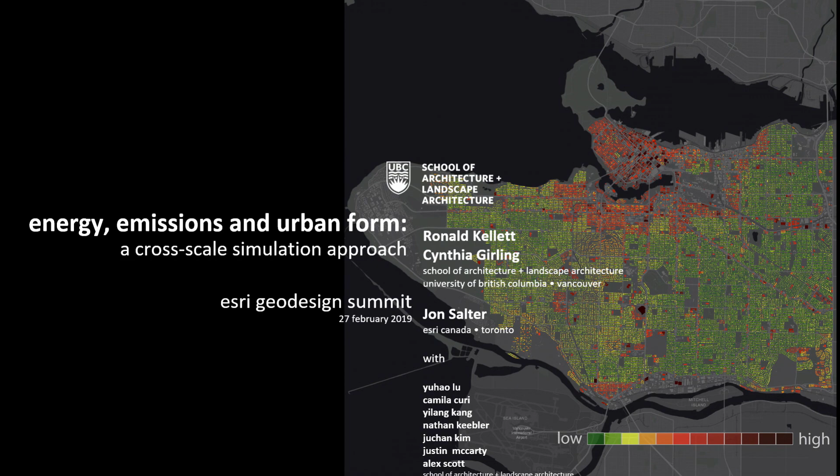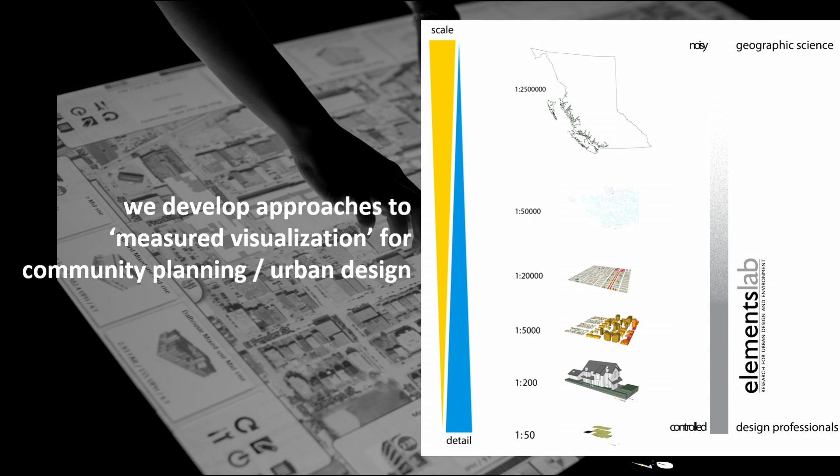So first, just a couple slides about who we are. Our lab develops approaches to different forms of measured visualization in community planning and urban design. In the geodesign ecosystem, we're crossing those four scales at the bottom. We're mostly design professionals, but our ambition is to understand those same ideas at neighborhood scales. We're a live research group of faculty and students in architecture, landscape architecture, urban design, planning, engineering, and economics, trying to bring those disciplines together to inform decision-making in the communities with which we work.

We're very sensitive to the notion that urban form is a context-rich experimental plane, including a great deal of existing and new buildings across many scales and types of cities. So we've anchored our work in taking visual spatial representations as an armature, so to speak. We've taken some very sophisticated tools, which we've heard much about in the last several hours, and tried to strip them down so they're more accessible to the broader diversity of communities with which we work. We also do some work in spatial indicators and metrics.

So I'm going to pick one project that's ongoing right now. It's called Built Environment, Energy and Emissions, and we're doing it for an Institute for Climate Solutions in British Columbia called Pacific Institute for Climate Solutions. The goal is that this agency has asked us to look at solutions that would reduce energy and emissions intensity of the 183 municipalities in British Columbia that also improve the quality of these municipalities at the same time. So we're mostly talking to policymakers at both provincial and municipal levels.

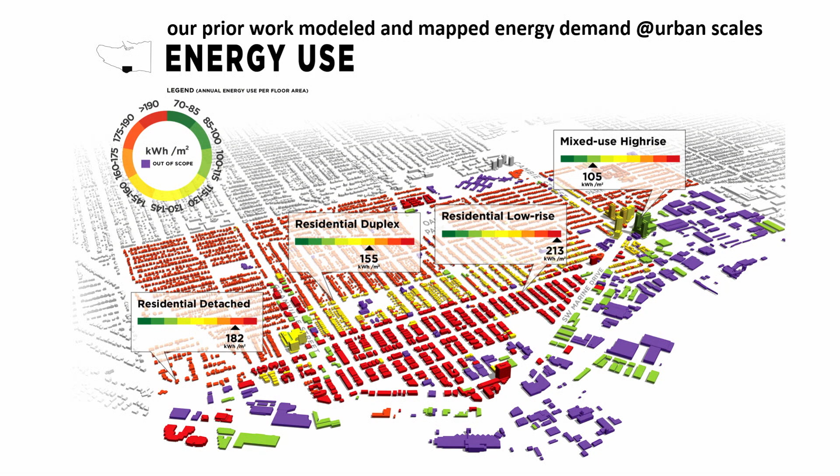And we've got this 183-community portfolio of very different sizes, density, ages, etc. As I mentioned, how we work is whole systems across scales. So our prior work, up until this adoption of some of these new tool sets, has always been around mapping and modeling a variety of things: water, energy, housing demand, etc. But we've always worked at this district/neighborhood scale.

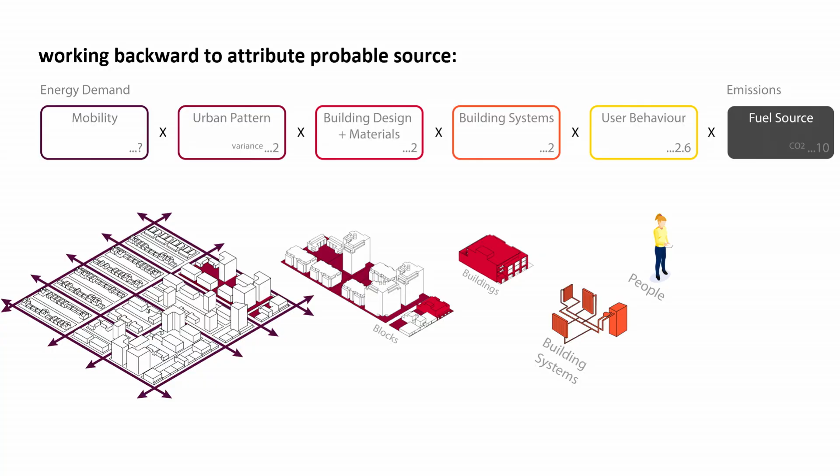In the energy realm, one thing we've spent quite a bit of work on is trying to take the modeling results at urban scales and work backwards to attribute them to the probable sources. So if this is the total energy use intensity number across a neighborhood, where did it come from? Mobility, urban pattern, building design, materials, building systems, user behavior, etc.

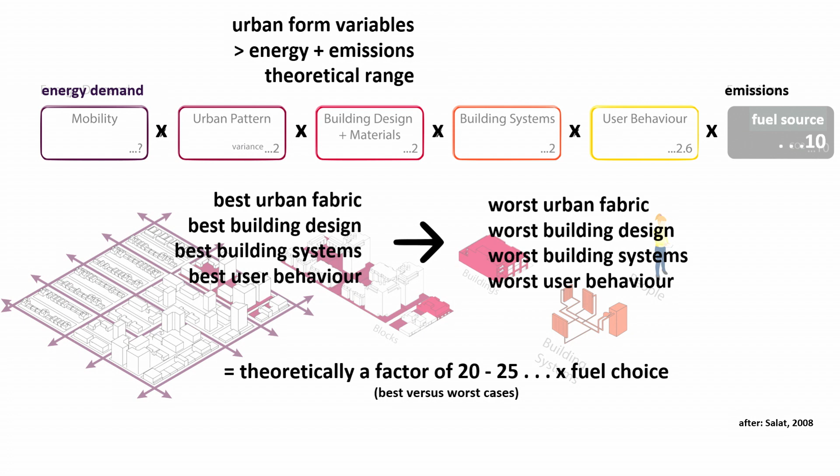The reason this is hugely important is that the same hardware performs very differently under different contexts. So if you take the same urban fabric, best versus worst, best building design versus worst, the range is about 20 to 25 times. And if you add fuel choice, that's another factor of 10 if you're looking at emissions instead of energy demand. So what we were trying to figure out is how we could help these 183 municipalities know which of those dials to turn that work best in their particular context.

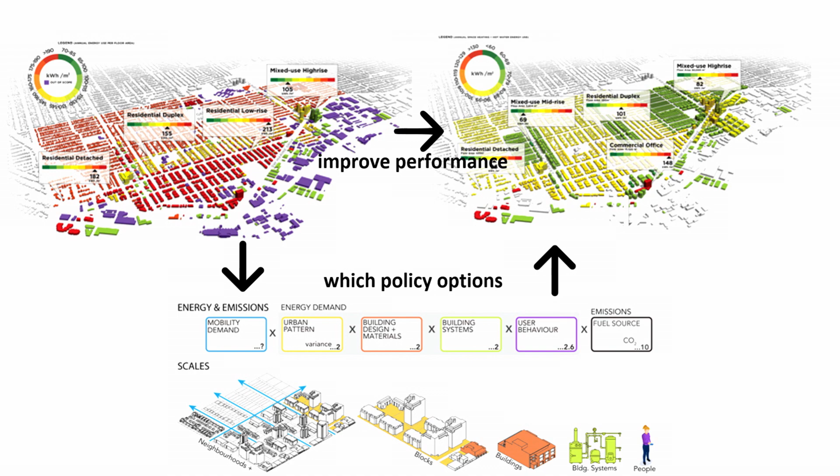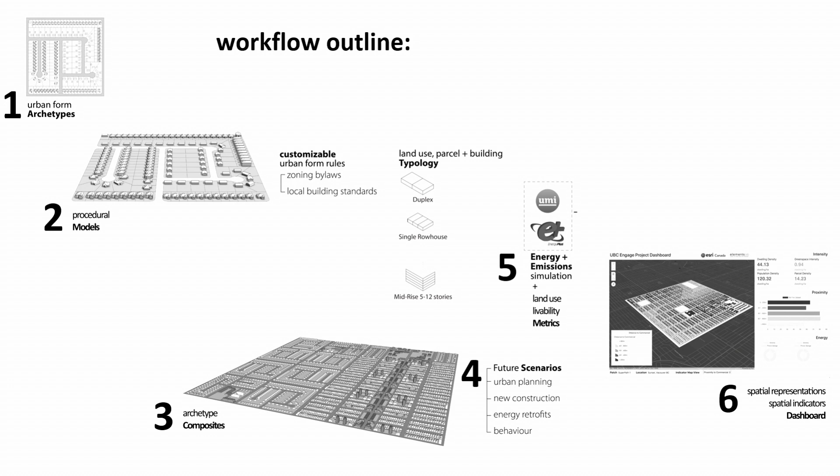So John and I are going to take a quick trip through the way we've approached this, and each one of those steps is a little project within a bigger project, so we'll just skip through this fairly quickly. The first thing was, in order to model all these different cities, we adopted an archetype approach to simplify the complexity of all these cities down to a few patches and patterns. We picked 6, based on their population, whether they were growing or not, and based on their geography and climate.

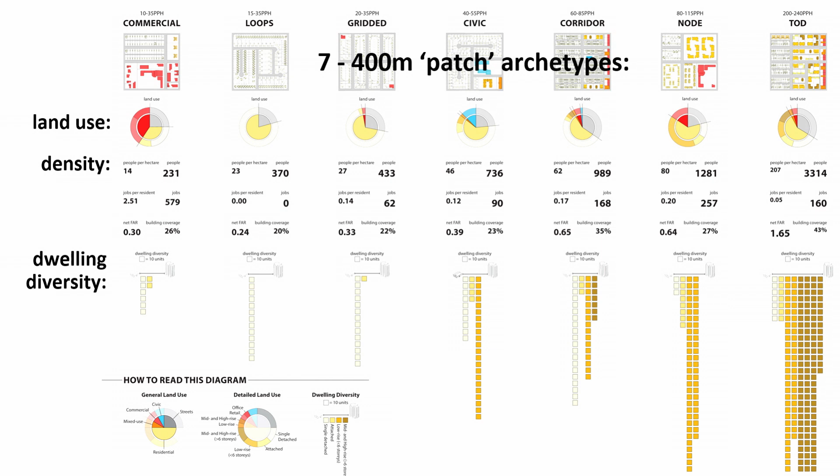After a lengthy series of analyses of land use in whatever millions of census tract areas that might be represented in those 6 cities, we distilled it down to about 7 400-meter patches. Each of them is different in terms of its land use distribution, its density, and the diversity of dwellings that are supported within that pattern.

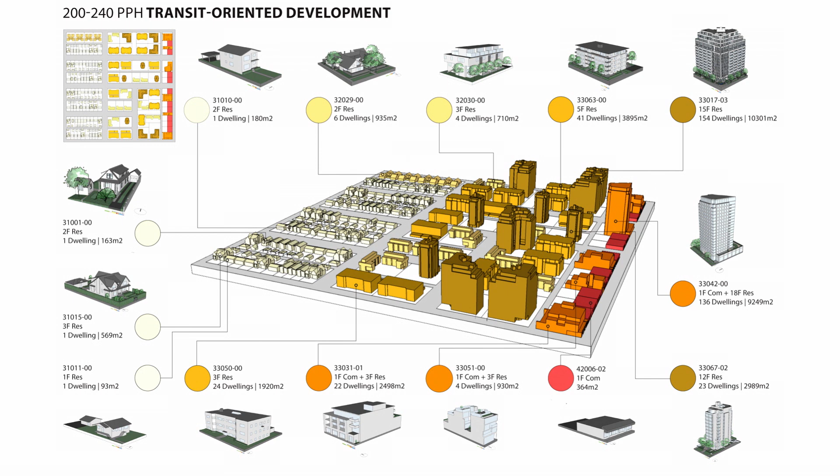Each pattern has a description that includes its land attributes and its building attributes. This is the densest one. It just shows you what it takes to achieve those overall metrics.

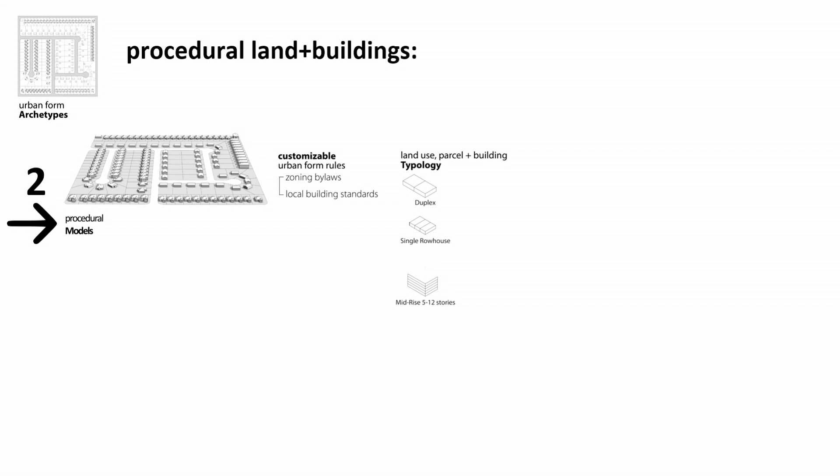We tried to take that approach and move it into a much more rapidly replicable and adaptable procedural modeling system. So first we looked at each of the land use types in those cities and patches, and tried to distill the range of parcel types associated with a particular land use and density. Then we broke out the building types, looked at their morphology, and started to isolate their attributes.

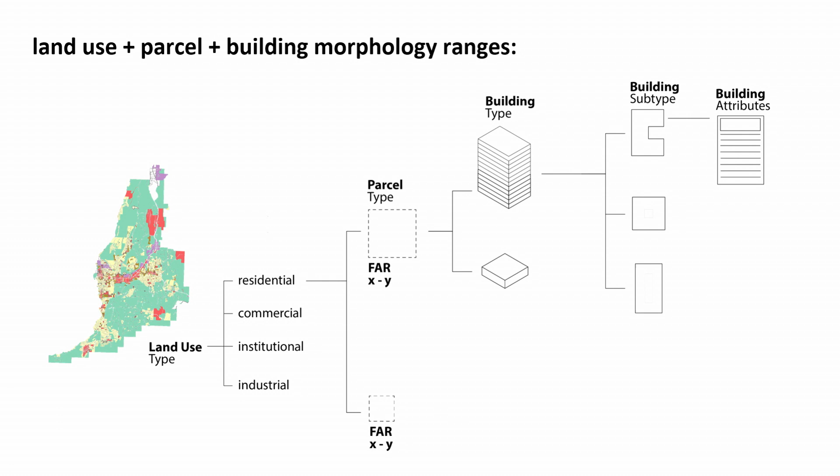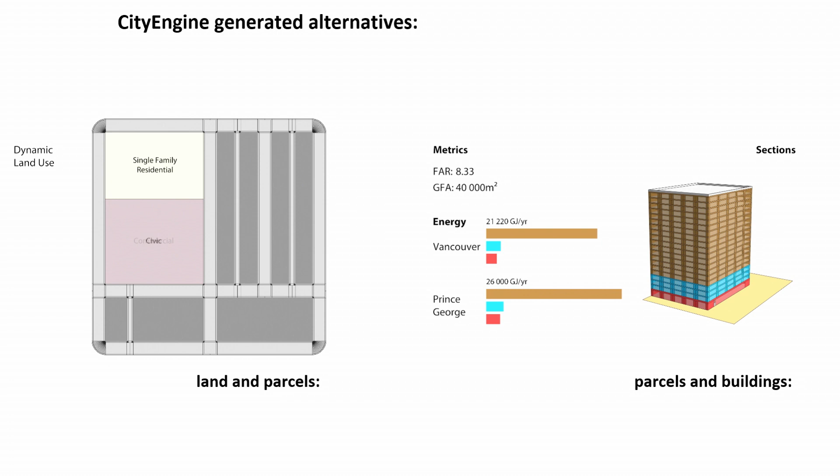The first thing we did was try this in CityEngine, because we thought we'd make a CityEngine model of all these patches and be able to change the parcels and building types that occupy them. That would be a sufficiently robust system to help us put these patches together in interesting ways, helping these communities understand what their urban form options might be.

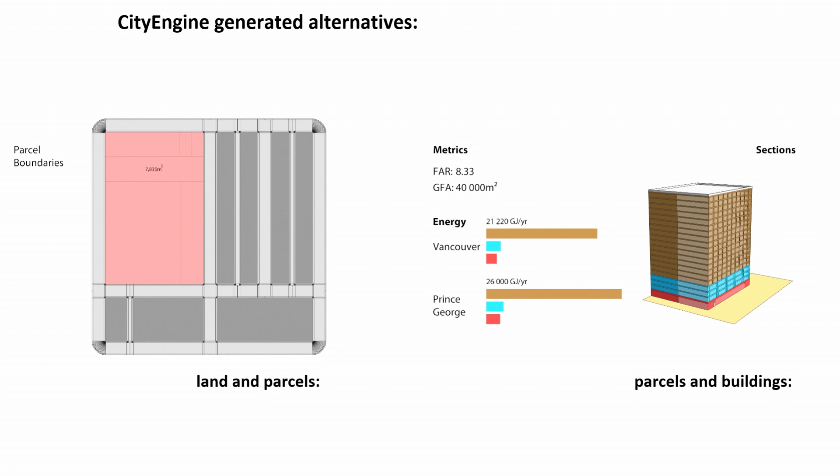And I think this is still running here. Unfortunately, I don't talk as long as the animation runs, but it ends in about 30 seconds here.

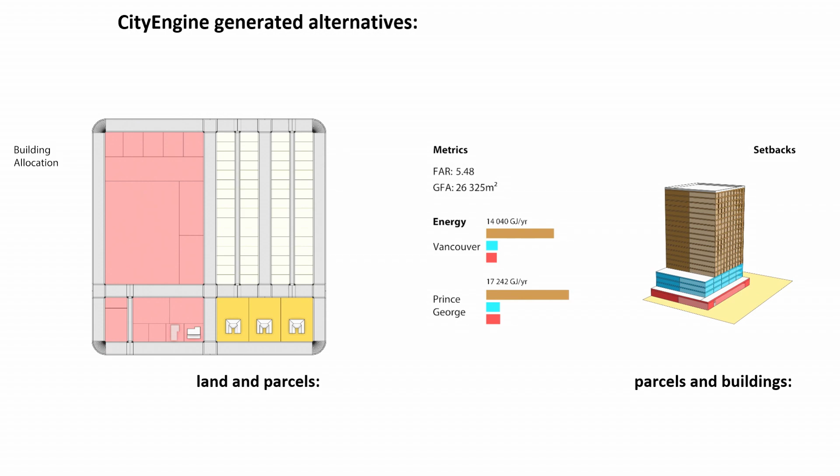The idea was that we would take this archetype patch, then customize it for the parcel pattern and the street network and the zoning envelopes, as many people have talked about for each of these units.

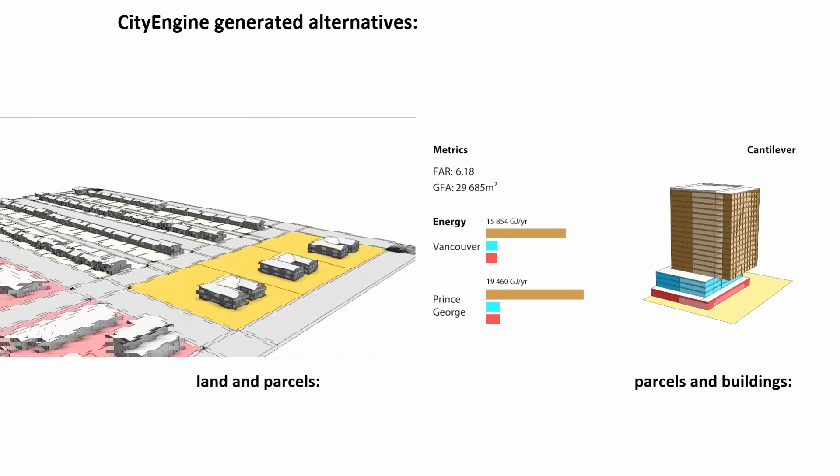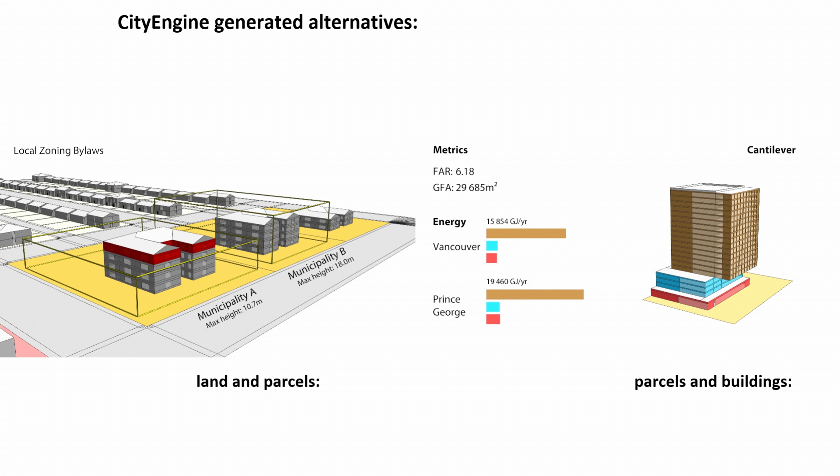This last image looks at the same zoning category in 2 different cities, one with a different height limit or setback system than another, and we were trying to figure out if we could embed this into the approach.

Quickly we realized it wasn't rich enough a way to work. So we started looking at it through more of an architectural lens and tried to understand the building types and parcel types that occupy that.

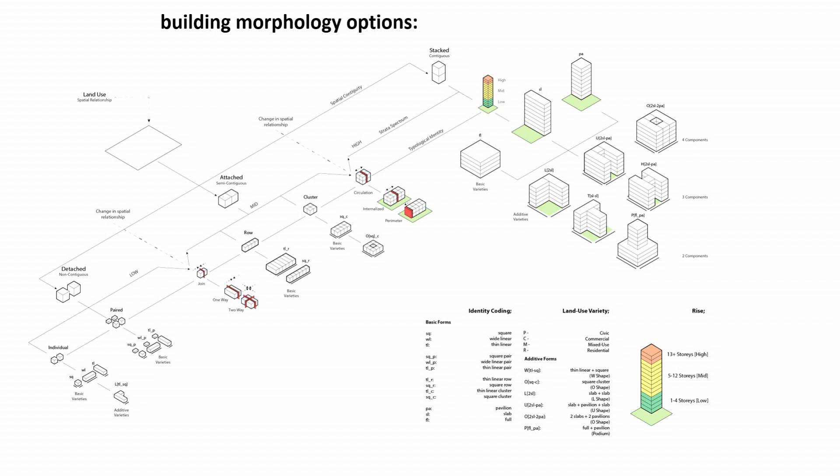So we did a series of studies of different building family trees to look at what their geometry and their massing and their heights might be. This was the first step in that.

Then we got really clever and decided to script it using Rhino and Grasshopper to simulate all these variations. In this case, we're just looking at the optimal distribution of number of floors, floor area ratio, and surface area for these building types.

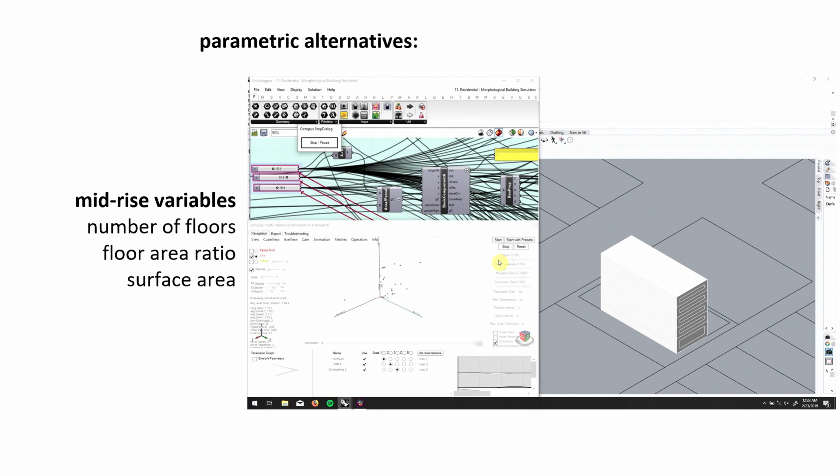You can't quite see that little matrix getting there, but what we wanted to look for was a smaller subset of them that performed really well. So we identified a smaller number of archetypes in this mid-rise parcel category, and they became our menu representing a logical response to whatever variables you're looking at.

The next thing we wanted to look at is not only making the patch work, but making the patch work in combination. So we started looking at how our patches assembled into more complex arrays.

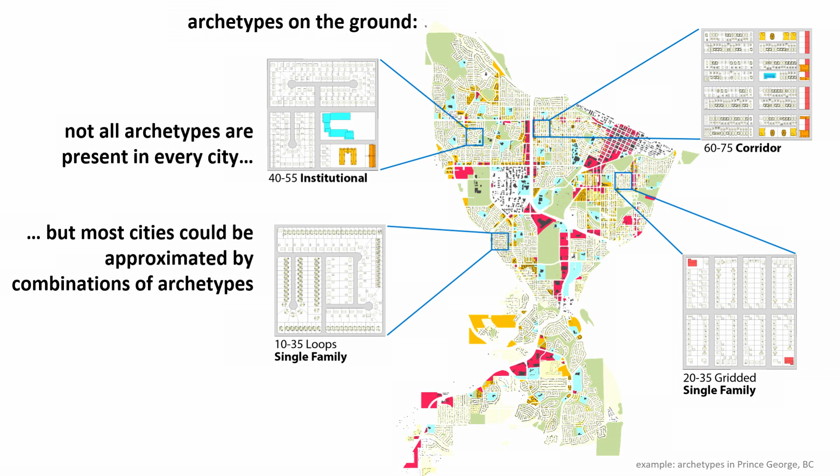The idea there was that not all cities have each patch type in them, but most cities could be approximated by combining them in the appropriate proportions.

So we started just playing with these in the abstract, looking at whether we could make a city that was at least half convincing by taking the 400-meter patches and making 1,600-meter patches out of them.

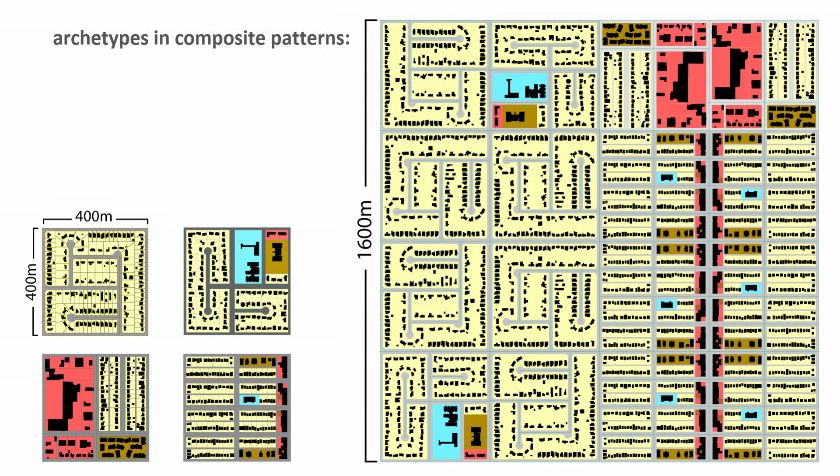Then we grounded that on an actual neighborhood in Vancouver, which we had done some other studies on in a prior year, so we had some empirical results we could compare the model results to.

So in that, we took these 4 patches here, and the first iteration, which we did in CityEngine, was just mapping them onto the existing structure.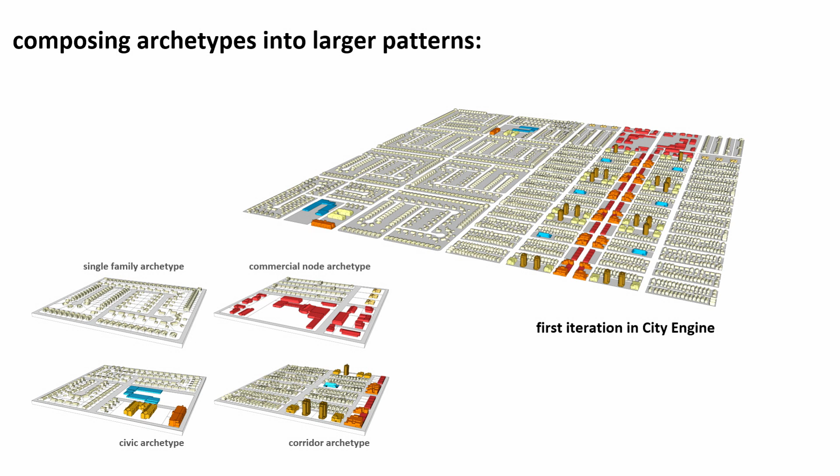Then we really started to fine-tune that using the actual data, so we threw some patches away and adapted others, and then started to build a more complex composition.

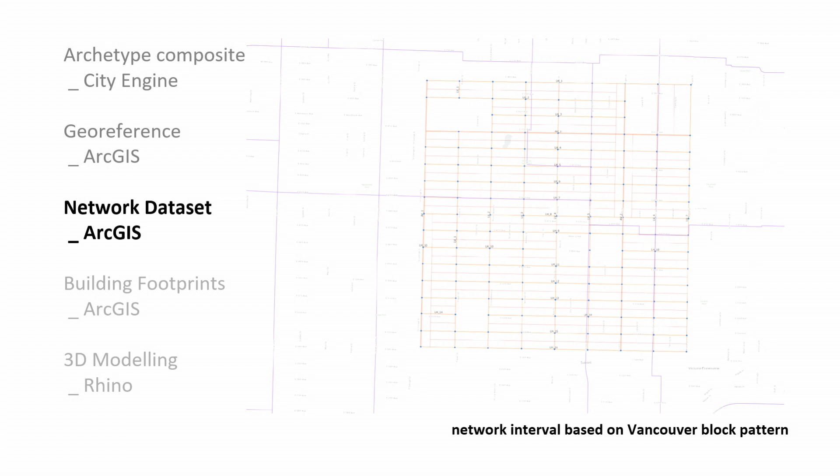So we added some network data based on the Vancouver block pattern, and we added some building footprints coming out of this archetype database, attaching them to different parcel types.

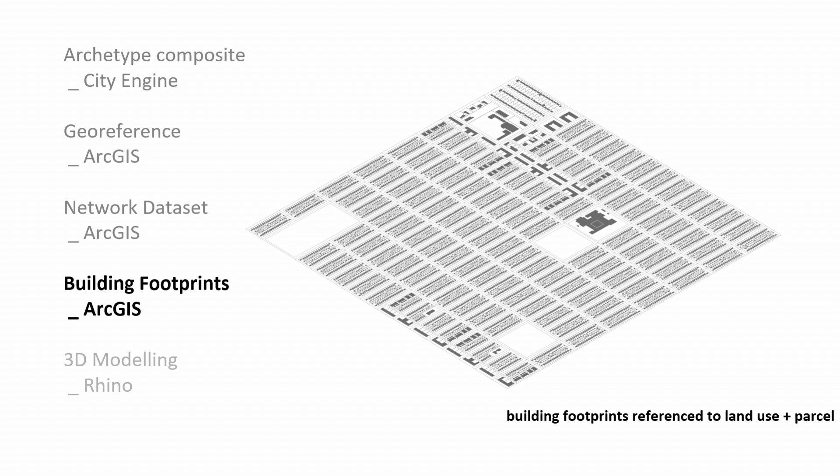And then we added a little bit more richness using Rhino's capability as a modeler, which is quite rich, and we have a school full of architecture students who use it in their sleep.

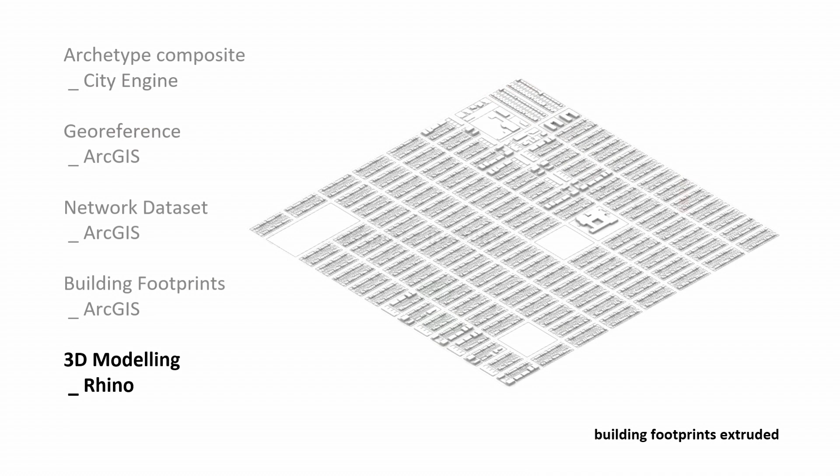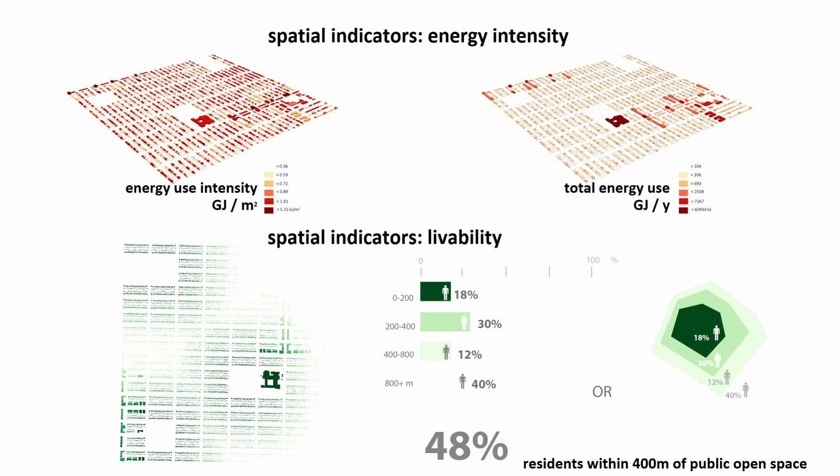And so out of that, we were able to take the quantitative, spatial, and visual information and start to create a series of indicators. So if you go back to the beginning, what we were trying to prove is that you could change energy and emissions intensity of the urban fabric and at the same time improve livability. Seeing those things side by side in the same model was huge.

Okay, I'm not sure. Yeah, I am mic'd up.

Good. So one of the things that Ron mentioned early on that I think is important is that in this project, it was a 5-year funding cycle, which is relatively unusual, certainly in Canada, and that gave us the capability to develop capacity and develop some of these tools. And it's just recently that we're starting to get to what the project is supposed to be about, which is developing scenarios, which is of course why I left the lab in December and joined Esri Canada.

I'm going to talk a little bit about this process. So this is the concept of our scenarios, and I'll say for any scenario people in the audience that these are not true scenarios, as in we don't have fully fleshed out narratives about all of these. What we're really doing is looking for bundles of strategies that can be applied in these different urban form types.

In the larger project, we agreed on a set of policy mechanisms that we were going to look at, including regulatory, economic incentives and disincentives, and then less commonly, information interventions.

So for example, in the low-density single-family patch that you can see at the top in blue, looking at things like smart growth and infill development is going to be much less likely in that kind of a low-density environment. So some of the options you might have might be limited to things like technology—giving incentives for envelope retrofits, for changing out heating systems, etc.

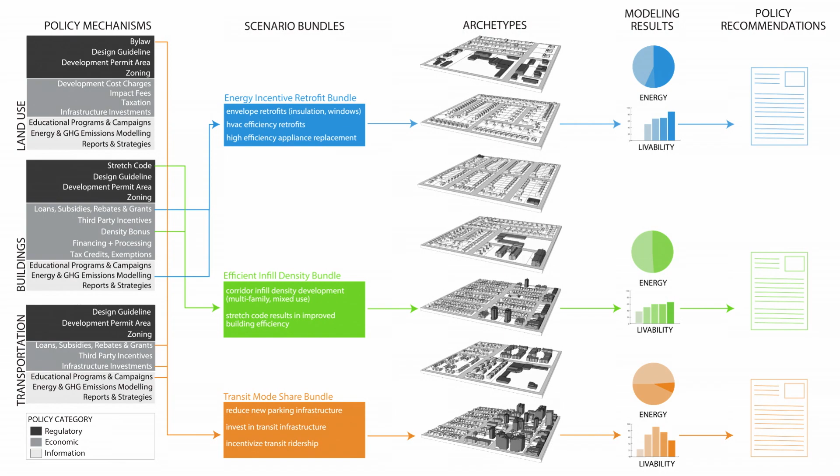In an archetype like the corridor or high street, you might have more options because you have more infrastructure for it. So you can start to look at things like infill for multifamily or mixed use, and associated with that, higher construction standards.

All of these carry through, applying them to the archetypes, and then going through to modeling for evaluation to look at both energy and livability, as Ron talked about. And then, very important to the funding agency, getting all the way to the end to policy recommendations.

The other thing I want to raise is that we're not working in a vacuum. This is a much larger project, as Ron alluded to. We were working with economists, behavioral scientists, and engineers.

So we were doing two processes here. One is from the building scale, actually aggregating up to the neighborhood level. But what I want to talk about here is the other way—actually moving down from the city scale with large-scale econometric models that are aspatial, and how can we actually downscale and spatialize those so we can use them in our modeling.

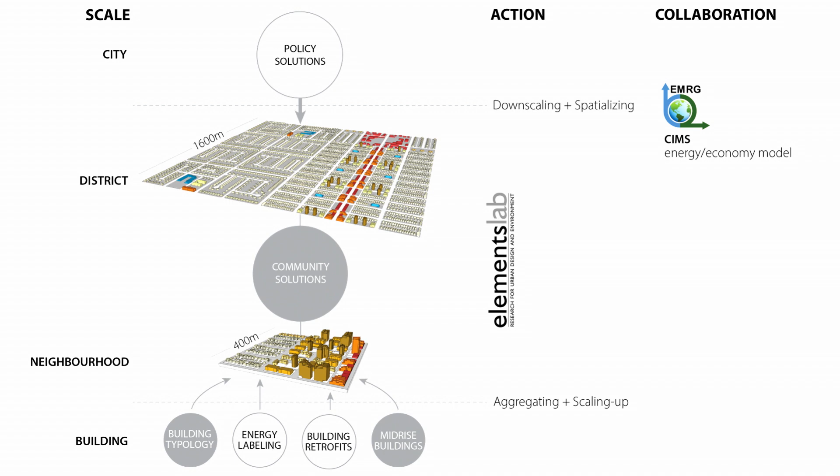So the model we're using, Dr. Mark Jaccard from Simon Fraser University has developed this model. It was actually used as part of the provincial analysis leading to our carbon tax in British Columbia.

But just the skeleton of it: you have inputs like population and population growth, building floor space and changes in that floor space, and different technologies. And as outputs, you get things like new stocks, and importantly for us—because this is often hard to get—costing information, so we can look at the cost of different options, and finally energy and emissions.

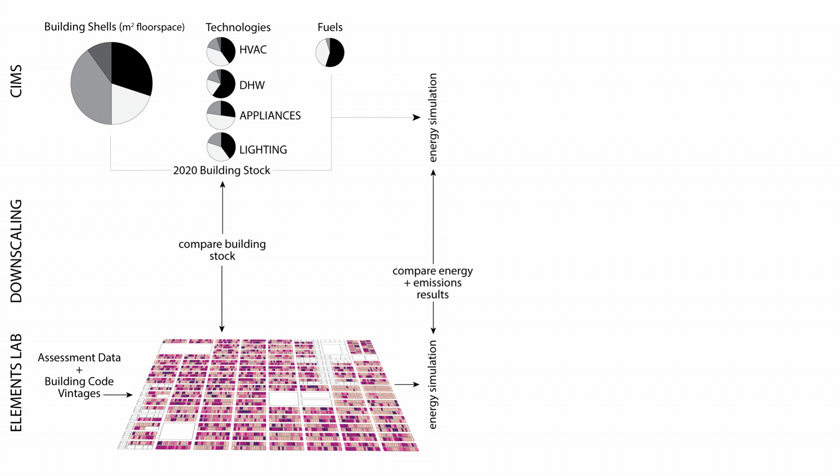Schematically, it looks something like this. Along the top is the econometric model, and as I said, it's completely aspatial. So all we have are composites of floor space and of different technologies that are applied to that floor space, but in no way does it ever tell you this is a building or this is how many buildings you're dealing with. It's all in these composite measures.

And so what we had to do was figure out ways to downscale that and actually reconcile it with the way that, as Ron was talking about, we've been assigning things through higher resolution data like legal assessment data about building ages, building and use types, associated vintages, etc.

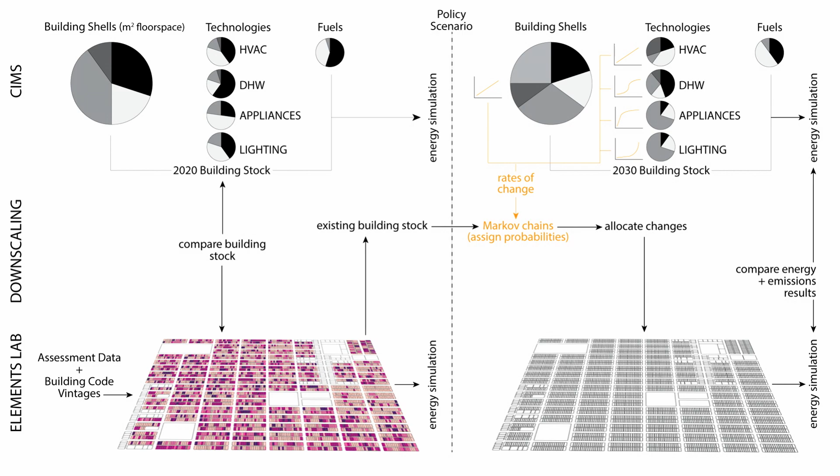When we take that on to the scenario side of things, the best way to think about it is that they have a curve associated with each of these things. Their building envelopes may change, their technologies might change, and there's a curve that describes how that happens. What we're doing is using Markov chains to try to harvest the probabilities from those rates, so we can go through parcel by parcel in our urban district and say this is the probability that this building is going to change.

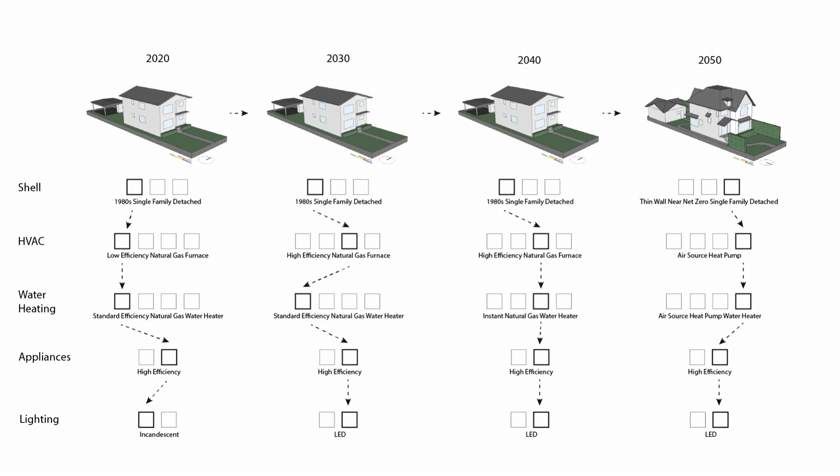This is what that looks like schematically. For each building, it would go through and say, potentially for the shell, there's a 20% chance this year that the shell is going to change, 50% chance that we're going to change the heating system, et cetera, and it will just go through and calculate that. At some point, when the building has reached the end of its life, probabilities go so high that it gets demolished and a new building constructed.

So we're at that point right now where we've done the reconciliation of our two methods, and we're using their model to drive our current conditions and our 2030 scenarios. The bigger idea here is they're very good at doing technology and behavior changes and associated costs, but nowhere in their model do they deal with things like urban form. So what we want to do is run their models, get their numbers about technology and behavior, and then start doing iterations of urban form so we can try different designs.

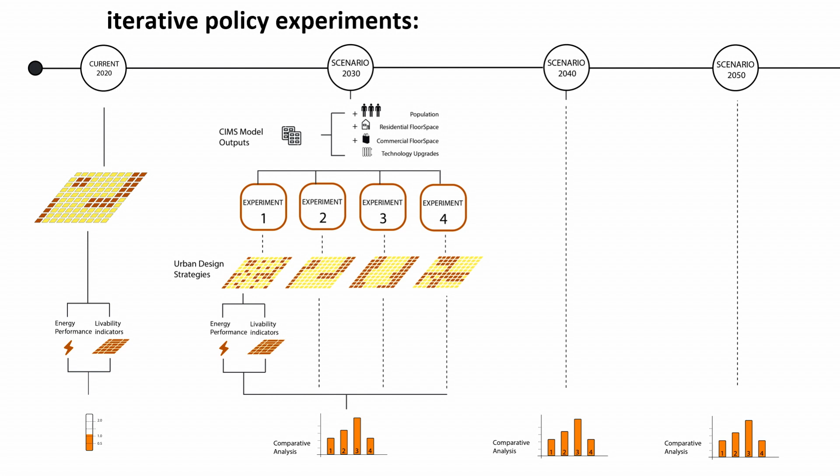One idea we haven't demonstrated yet is that their models may actually be too conservative if you started to think about what you could do with urban design to try to increase density in these areas. We might be able to actually change more of the type of density that we can get in these different areas.

The last thing I want to do, mostly to give credit where credit is due, is mention that for the energy simulations we're using a tool called UMI, the Urban Modeling Interface, developed in the Sustainable Design Lab at MIT. Basically it allows us to do building-by-building dynamic energy simulation for the whole patch, and it also takes into account neighborhood-level factors like building siting or orientation and inter-building shading, so we can get through to the energy model at the end.

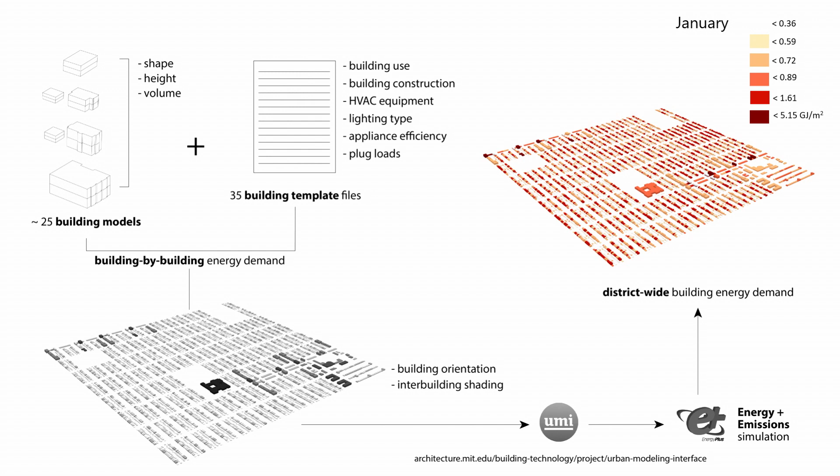The final risky thing I want to do is a live demo, which they would tell you never to do. But I'm just going to swap out. And this is work... Yes, as they say, risky. I don't think it's probably going to come up. Oh, there we go. Thank you.

Much appreciated. So the main point of this is where we're going. Ron talked about measured visualization—this is what we do. We want to get to a point where we can put all of these scenarios and different approaches into a unified interface. In my new position at Esri Canada, this is the kind of work we do, working with universities to help them build infrastructure. This interface was developed by Michael Lubert and David Kosowski and our group in education and research.

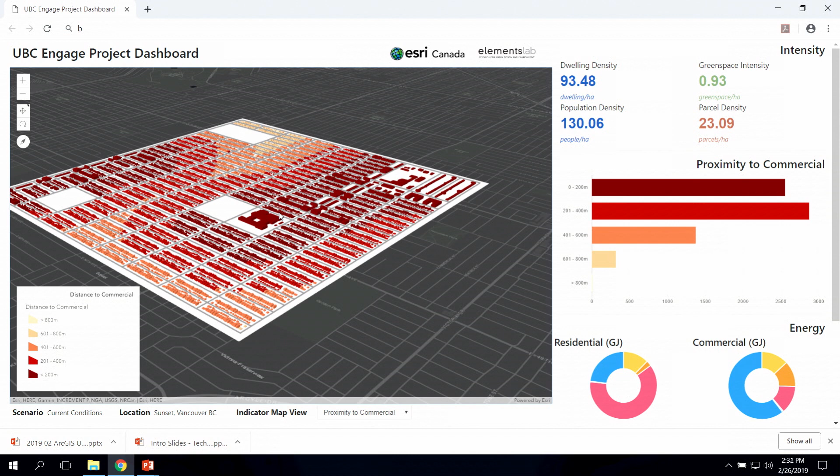Just quickly going through some of the capabilities—if I can get my mouse up, there we go. So obviously real-time movement. It has live metrics attached, commonly seen in a lot of these types of dashboards. In this case, we're looking at proximity to commercial services, one of our livability metrics. We can also change that to different metrics like proximity to green space, and then, importantly for our work, energy use intensity, with the associated charts updating.

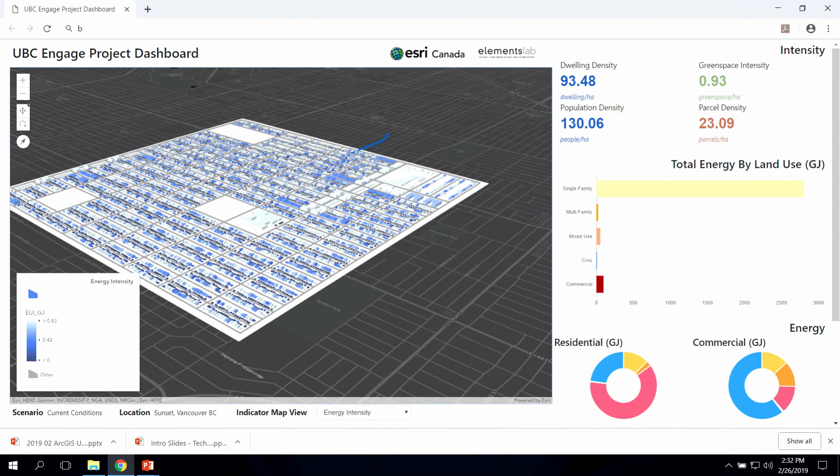We also have pie charts which are dynamically linked, telling us about the breakdown of energy use. The last piece I want to show, because this is where we're headed, is some of the interactivity we're trying to build in, where we can select—if you can draw it—a smaller area and have all of the metrics update dynamically. The broader idea is to be able to swap between scenarios, but also change urban form in smaller areas within that, so we can look at different ways of intensifying, et cetera.